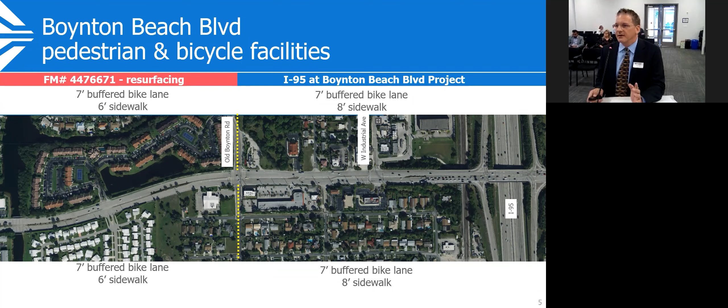I have a few slides here to show you exactly how the project lays out with the other two projects and to show the continuity. From the west, you see there's our project, a resurfacing project to the west. And then the project in the middle, the I-95 Boynton Beach Boulevard project, is the one being discussed today. And you see some of the elements for the buffered bike lane and the sidewalk, trying to maintain continuity with the project to the west.

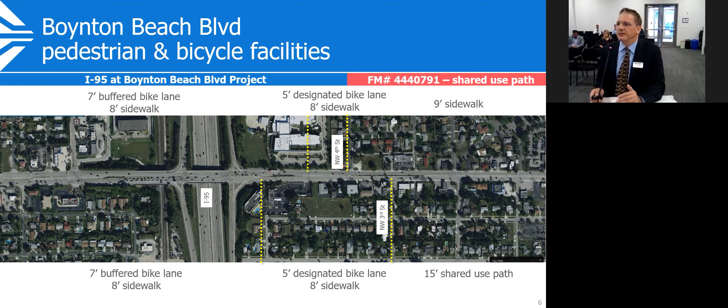And then going further east, there's another project, a shared use path project to the east. And so this project is in between, and they found a way to harmonize it and establish continuous facilities through Boynton Beach Boulevard. And so with that, those are the two projects. If there's any questions, I can answer them at this time.

Staff, are there any public comments on this item? No, Madam Chair. Okay, I need a motion to recommend adoption of amendment number 2 to the TPA's fiscal year 2022-2026 TIP, and then I will open the floor to discussion. Motion to adopt. Second. Sorry, who is the second? Thank you. Okay, now I'll open the floor to discussion. I do have 2 tent cards raised, and I don't have virtual hands raised at this time. Okay, Alex, let's start with you.

Yeah, I just had a question. If you had a little bit more detail on the PGA at I-95 project, because I see the description just mentions that this is to add a special use lane, auxiliary lane. I was just curious as to what that exactly meant. I actually moved to that area a few months ago, so I have special interest in this project. Yes. I'm going to reach out to FDOT to find out exactly the nature of that. Do you have any additional details? I don't, but maybe during the course of the meeting I'll reach out via email. I was just curious whether this was adding capacity. What is the nature of that auxiliary lane?

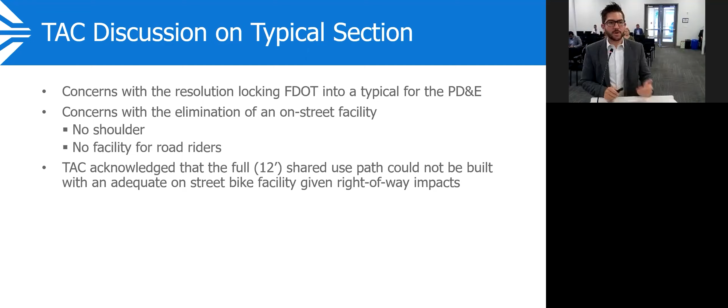There were also some concerns with the elimination of the on-street bike facility, mainly because that on-street bike facility also creates a shoulder, and removing it doesn't provide a facility for riders that prefer to ride on the roadway. The TAC did acknowledge during the meeting that it's unlikely to fit the full DOT FDM spec shared use pathway along with an on-street bike facility, given the right-of-way impacts. In addition to the typical section, there were 2 other comments. One was regarding the displaced left turns. There was some support for that during the TAC discussion.

And another item that was pretty heavily discussed was the inclusion of shade trees in the swale if possible. We did speak with FDOT regarding this. The landscaping can be part of a future project, but TPA staff is going to have to work with DOT a little bit more regarding funding options for that future project, and it will have to be a separate project in the future. But again, it's still an option, so we're going to be exploring that.

So finally, that leaves us with the resolution language, which I have on the screen for you here. We worked with DOT quite a bit on this resolution language, and we think it provides the flexibility that everybody was looking for, especially regarding the typical section itself, as well as not locking DOT into an intersection typical for the Jog Road intersection. So with that, I would like to move to recommend the new updated resolution language. Thank you.

Okay, staff, are there any public comments on this item? No, Madam Chair. Okay, I do have a comment on that. Well, I was going to say, I do have quite a few tent cards and I have virtual hands raised as well. I don't know if you want to do virtual or the in-person first. Let's do the in-person first and then we'll pull the virtual. Okay. So we'll do this before we have a motion? Or should I get a motion? It's your preference, Madam Chair. Yeah, I think we'll start. CJ? Yes.

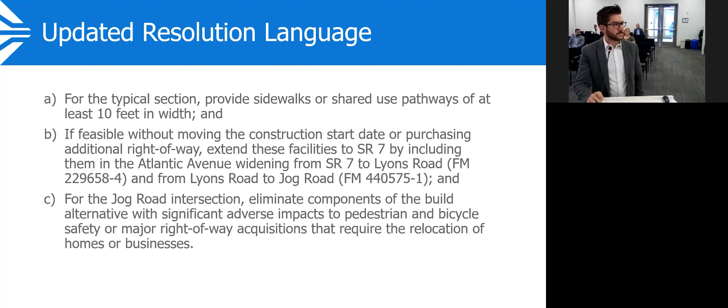Connor, as you know, the town of Jupiter has proposed the alternative design for the intersections. And after you updated the information, right now FDOT is evaluating if that is feasible. Yes, that's correct. So we did have staff internally review it as well. They did express some concerns, particularly with the pedestrian crossings and the pedestrian islands and the number of those. But as far as the feasibility of it, I'd have to leave that to DOT. I don't know if DOT wants to speak on that.

The geometry that we had concerns with. One was the concept that we saw was drawn with 4 lanes on Jog Road as well as Atlantic Avenue at the intersection. So it doesn't provide for the 6 lanes for the future condition. Another thing that we were looking at was regarding the shared use paths. There were no on-street bicycle lanes, so the shared use path with the 10 feet would still require 4-foot clear on both sides. So we would be expanding that by 8 feet on each side, the right-of-way widths.

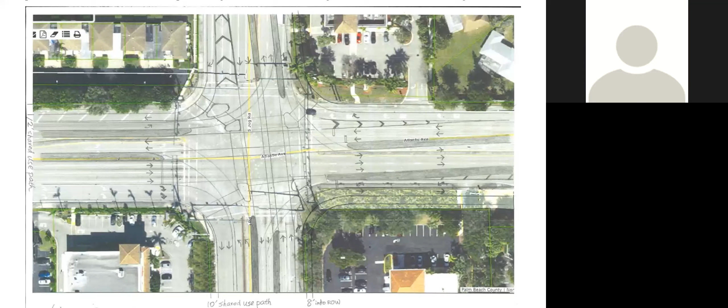Yeah, we can have a separate meeting, but as Connor said, there's still the safety concern and access concern and driver expectation that is going to remain in addition to the right of way, if we assume that the level of service or delay is going to be resolved.

And let me just briefly address that in terms of the pedestrian crossing, as well as the cyclist, the safety compared to the traditional intersection design, which does not allow the pedestrian to get through the intersection from one corner diagonally to the other corner within a cycle. This particular design can allow the pedestrian as well as the cyclist to get through intersections, even diagonally from one corner to the other within a cycle.

And there is much less time spent crossing this intersection. So with much less time crossing the intersection, pedestrian crossing safety will be further ensured. And the concept of this design is the pedestrian and the cyclist will be moved through the shared use path, 10 feet to 12 feet wide, to get through intersections, as opposed to the current 12-foot crosswalk here.

And the refuge island within the intersection is much bigger, for staging the cyclist and pedestrian safely onto the refuge island. So yeah, compared to the existing intersections, the pedestrian crossing safety has the full benefit compared to a traditional design as well. So we can discuss this in a separate meeting.

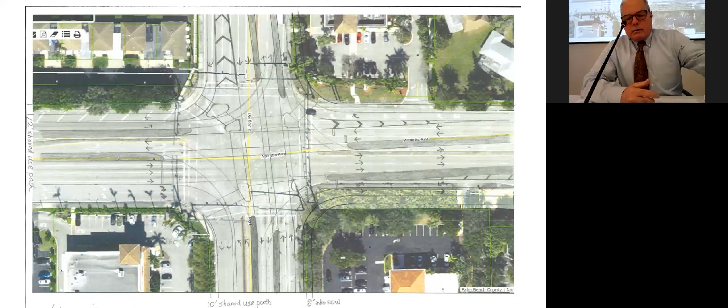Correct. So DOT is still entering the PD&E study, so they're still going to be working through some designs of the intersection as well as the typical section. So right now we're just moving forward with supporting it. We just wanted to honor the board's direction and steer away from designs that would severely impact right of way, specifically in the northwest section.

One of the concepts with the partially displaced left had a lot of impacts to both access as well as single family homes in that northwest section. So we wanted to steer away from that, but still allow DOT the flexibility to design the best typical and intersection design.

Okay, the other question I had was it talks about a typical section with sidewalks or shared use paths of at least 10 feet in width. Is that an acceptable dimension to be considered as a shared use path? So I believe the resolution says either a shared use path or a 10-foot wide sidewalk. I could be wrong, is that correct? It says provide sidewalks or shared use pathways of at least 10 feet in width.

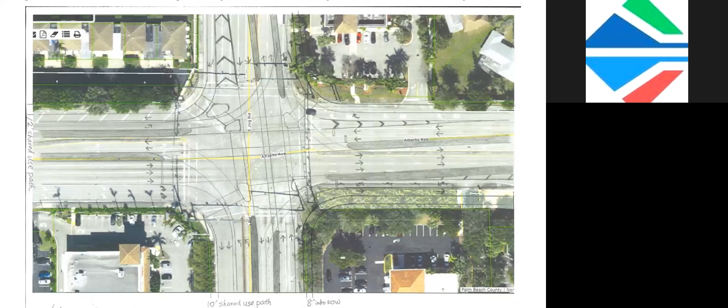Correct. So we worded it that way because the FDM has very specific guidelines for what a shared use pathway is. For the TPA, a 10-foot wide sidewalk could be considered a shared use pathway, but we did want to keep that wording in there so that if it's a 10-foot sidewalk to DOT, we can still build it, and cyclists can utilize it as an area in which they can feel safe to bike.

You also mentioned to the other gentleman in your responses that you were going to require another 8 feet of right of way to be able to use that 10-foot shared use pathway. Can you elaborate on that a bit? Yes, so the concept that was just up did not have any on-street bicycle facilities. It only had the 10-foot sidewalk.

It was labeled as a shared use path, but in order for it to meet shared use path criteria, it would need to be 12 feet wide and have a 4-foot clear in the front and the back. So leaving the resolution saying 10-foot or 12 keeps that open: if we do use a 10-foot sidewalk, you can eliminate the 4-foot clear on each side, but you will still need an on-street bike lane with that type of concept. Okay. I don't think the resolution says that though, does it?

It's open. It's open-ended. Or is it for the purpose of it provides sidewalks or shared use pathways of at least 10 feet in width. So it does not say anything about the removal of the on-street bike lane. So if you do go with the 10-foot sidewalk, you will need the on-street bike lane. If you go with a shared use path, it'll have to have the 4-foot clear and be 12 feet in width.

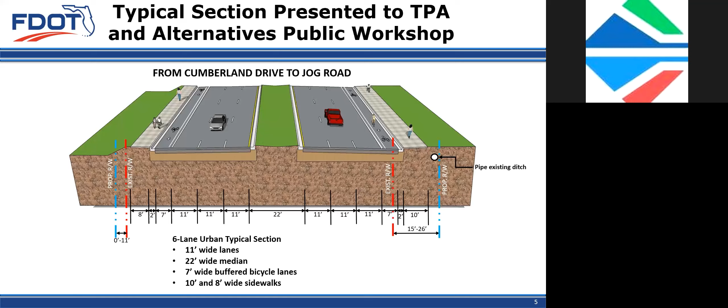Good morning. I'm Rudy Gutmurray. What I would like to add is, the presentation that we did and the typical sections that we presented do fit this resolution, right? So as a committee, you have those three typicals that fit within this resolution. And you have an option today, you can recommend one for the board's consideration. That's also a possibility. Rather than come back 3 months later, 2 months later, I would rather have you take a look at those typicals again that fit with this resolution and potentially make a recommendation that could be carried to the board. That could be one of the options.

Because there are some significant differences between some of them and options 2 and some of the others. So if we want, we can go over those three typicals that meet this language that you just saw and describe those. And maybe we can take a look at those if you want to make a recommendation today. I just want to make sure that that would be okay. I mean, I'm okay with that. That's not what is in the agenda.

So as an advisory board to the board, right, we're making a recommendation from the technical side of the business. So we've conducted an alternatives analysis and we've developed these three typical sections. And so that's what we're going forward to. Essentially, we will finish the analysis on those three typical sections. We're still working with the Water Management District to try and minimize right of way along the canal side of this typical section that would allow us maybe some flexibility there in what would ultimately be recommended.

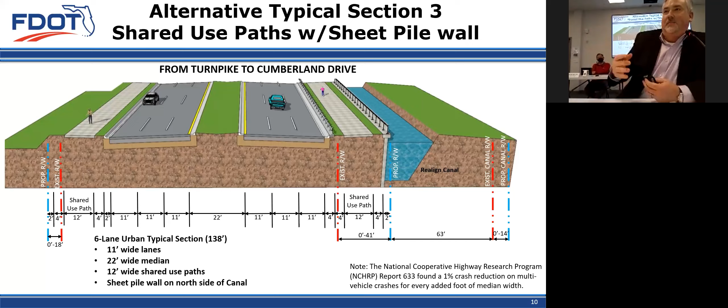Thank you. Just in looking at the typicals, you're proposing something in excess of 130-foot typical section. Is that still roughly the numbers we're talking about for a right of way? Because I'm interested in the larger picture or the implications of what this could mean. Correct. It's going to be up to an additional 8 feet of right of way from the original concept that we proposed, from 4 to 8 additional feet. And so the current ultimate right of way is 130. 130, okay. Yeah. It's not what we have on our typical or our thoroughfare map at the county.

This is a suburban C3 context under your context manual. You all are undoubtedly doing other PD&E projects and you're running into this throughout District 4, I'm assuming. Is this a typical example of what you're seeing in that context, that you need right of way beyond the ultimate right of way that you'd previously identified?

And I may be asking the design people, and this is more of a planning concept, but I'm trying to understand, do we have a situation where a lot of the thoroughfare maps and so forth, ultimate right-of-way maps that have been identified, are based on an older, non-Vision Zero, not a complete street concept? And so we're going to need to go back and modify a lot of thoroughfare maps to ultimately express larger rights of way because of these concepts of Vision Zero shared use going forward.

Because my concern is the context may be that, and to do all these other things, but we've not done the nuts and bolts, even at the county and municipal level, of what does that mean ultimately for the DOT roads? And that's what I'm trying to get at: is this indicative of a larger problem we're looking at, that the context is going to demand further changes that are going to be knock-on changes?

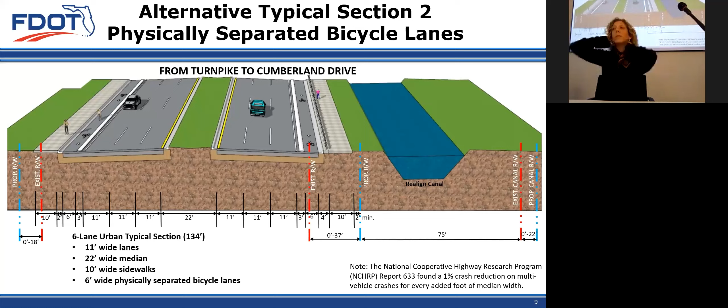Thank you. I just have a couple questions because I'm trying to understand where we are in the process related to Alex's comments on whether this committee should evaluate at this current moment the alternatives that are suggested. So from what I understand, DOT has presented a previous project as part of the TIP, and it was not supported by the TPA governing board. And since that time, TPA staff has been working with DOT to refine alternatives to accommodate the needs of all users. And so these suggested alternatives are being conceptually approved, and you've crafted a resolution which captures these concepts, but DOT still has to go through the entire PD&E process, right?

So the presentation that the board received was somewhat similar to this. It had different typical sections. It had different alignments for the Jog Road intersection. The board just expressed concerns about certain aspects of some of the concepts. And that's where we started working with DOT directly to figure out which typicals we could move forward with, which typicals we didn't want to move forward with based off those discussions that the board had.

And that's where this resolution comes in, where it phrases it so that it gets rid of those concepts like that displaced left that was eliminating, I think it was 8 homes or something like that. It gets rid of those, but still maintains certain typicals and intersection alignments. But again, it still allows DOT to have that flexibility to continue with their PD&E process, have their public meetings, show the public different options and see what they think of those different typical sections.

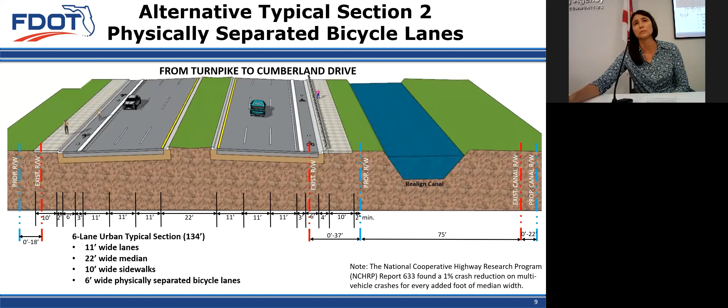Just to give a little bit of a time frame, we did have a public workshop 4 months ago. That public workshop was based on a typical section that was used for alternatives analysis that was concurred by TPA at that time. And we went for the public meeting, but from that public workshop, and since the typical section was approved by TPA, approved may not be the correct word, concurred by TPA, the board decided to change the philosophy about how the pedestrians and bicycle movement should be handled.

So after our public workshop, during the public meeting, there were some comments made about potentially separating the bicycle lane from adjacent to the travel lane. So we went back to the board after our public workshop to present the summary of the public workshop and what alternatives were presented. And during that board meeting, we were requested by the board to look at potentially separating the bicycle lane from the travel lane and maybe using a shared use pathway that meets the FDM guidelines.

So since then, we went back to the drawing board. We worked with the TPA hand in hand. We developed 4 or 5 other typical sections that meet the FDM, Florida Design Manual, for the design. And we presented that to TPA. And in that meeting, TPA staff looked at those typicals, and based on that, there were 3 typical sections that kind of met the board's guidelines to separate bicyclists from the travel lane, the typical sections that you see here that were presented during the previous presentation. There were 3 or 4 typicals that kind of met the direction the board provided to us. And we presented those typical sections during our last meeting.

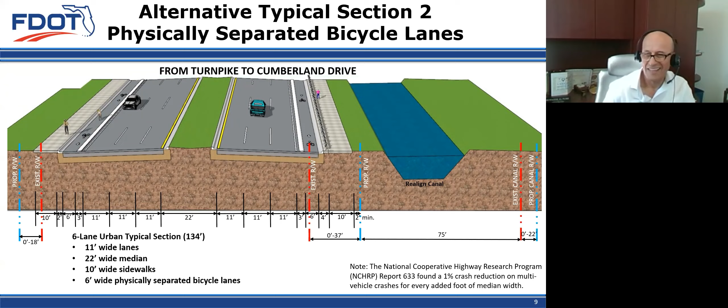So Mo, from an operational standpoint, nothing has changed with these typical sections. This board has looked at the operations and essentially we're providing a 6-lane roadway. The big alternatives came into play at Jog Road. And then the revised typical sections specifically relate to how much right of way is going to be acquired and how we're going to take this piece of Atlantic Avenue, from Turnpike to Jog, and retrofit it or transition it from the piece to the east. And we've got a project already under design to the west.

So it is a balancing act. More right of way we need, more money we need. It'll take longer to then acquire the monies in the work program and fully fund the right of way. So whatever the effect of the decision of this TPA will have on the project, we will listen to the direction given by the board in terms of their desires. And if we can make it fit within our FDM guidelines, we will go forward with that as our recommended alternative, secure our environmental approval, and then start amassing the monies necessary to do this.

So one of the things that we've been told is this is a very high priority for the TPA. By the public, it can't happen fast enough. So we've got design already underway for this, I think this consultant's been selected for this. So we're ready to go to the next phase, but we do need direction on what the typical section needs to be. And I know we're wrestling with much bigger programmatic issues.

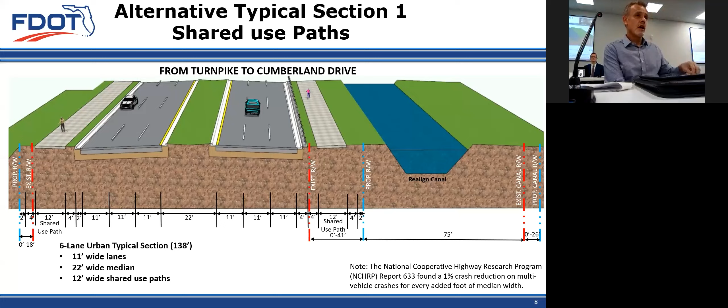Correct. So you have done some type of analysis comparing those 3 alternatives. You indicated that you needed to evaluate and compare them, and that has happened to a great extent. May I? Sure. So that evaluation that you see is conceptual, right?

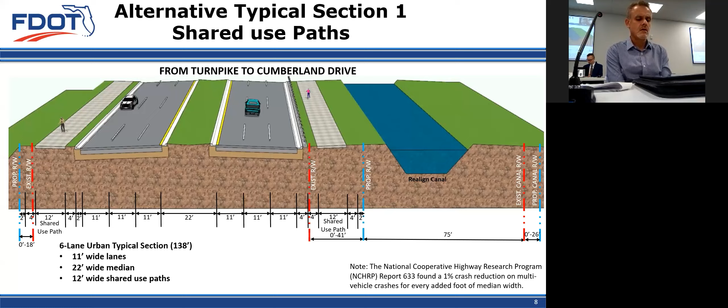We took the typical section 1, with the 2 shared use pathways on both sides and no bike lanes adjacent to the travel lane. Typical number 2, we have physically separated bike lanes and 10-foot sidewalks on both sides of the roadway. And the third typical is, again, no bike lanes, with guardrail and multi-use pathway on both sides.

So what we did, we took these widths, 138 feet, 134 feet, or 132 feet, and then conceptually looked at a higher level at what would be the right-of-way impacts.

How much extra right-of-way are we going to need? What impact is it going to have on pedestrians and bicyclists? Now, that's at a conceptual level. Once we select whichever typical section gets recommended, then we will actually have to do alignment, like engineering drawings, to be more

concise with the impacts. In some locations, it could be modifying the intersections, modifying the intersection geometry and all that. So that's why I said we did a conceptual level analysis. And once the typical is selected, we'll do a detailed analysis like we did before our alternatives workshop to present it to everyone.

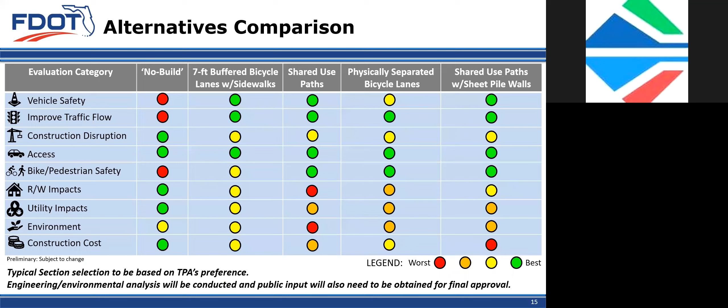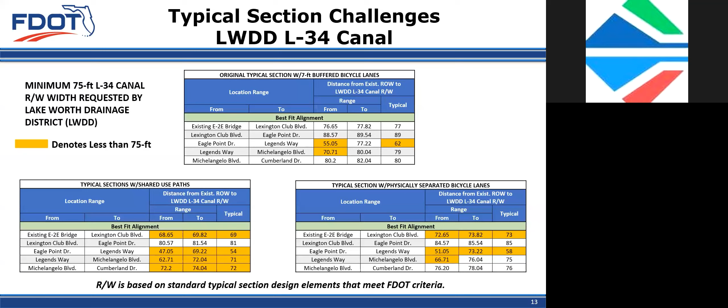And that's fine. My other bigger question, and again, the big issue that I have with the alternatives being proposed: from a bicycle pedestrian safety standpoint, we're saying all three alternatives are the same or similar, all have a green dot according to this alternatives comparison. As I indicated in the meeting we had 2 months ago, I had a significant concern with any option that removes on-street bicycle lanes.

There is a safety concern because you're still going to have cyclists using the road, but now there's absolutely no place for them to go. So to indicate that an option like that would have the same level of bicycle pedestrian safety as an option that actually provides on-street bicycle lanes, I have a disagreement there.

The second one is, if we're now saying all of those cyclists are going to be using this shared use path, several studies have shown that shared use paths in areas with a number of conflict points between cyclists and vehicles can actually result in an increase in accidents.

A few weeks ago, I was in this general area and decided to drive the corridor because I hadn't been there in a while, to familiarize myself with it. There's some diversity in the corridor, not all areas are the same, but some sections have a multitude of curb cuts, driveways, commercial plazas with supermarkets, cinemas, and things like that.

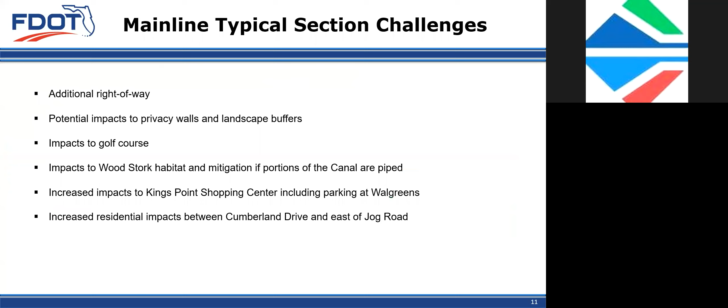Mhm. And we can certainly respect everything that you mentioned. It is valid, right? You're a professional in the business. And I think in terms of the body of knowledge that's accepted by Florida DOT and the Florida Design Manual, we don't have a design in there that we believe is unsafe or one is less safe than the other. So we are accommodating the pedestrians and bicyclists in a safe fashion.

Now, degrees of safety, there's a couple studies that are suggesting. I thought that the colors indicated degrees of safety, but well, and so this was our assessment. And if you have a contrary point of view, this is a great forum to bring it up. And if you think we should change those, that should be a recommendation to the board.

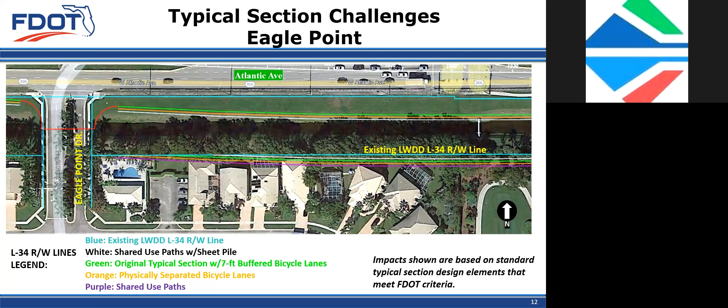One thing that you did point out is you said you do not support... Sorry, can you talk into the microphone? Thank you. One thing you pointed out was that you do not support an alternative that does not provide the on-street bike lane. And I do not, again, because of the concerns that I just indicated. I think it increases risk for cyclists.

There's going to be cyclists riding on this road, and now they absolutely won't have a facility. And second, if we're now saying all of them should be riding on this other facility, that would be okay if we had an area in which there's no conflicts with vehicles. There's multiple conflict points, and that's why I wanted to drive the area. I'm familiar. There's quite a few. So that would create a less than safe situation for cyclists.

I respect your comments, and those are very valid comments. But still, we have to go forward with one alternative that you all recommend. So that's the guidance we are looking for to move this project forward. We are already 6-7 months delayed. So help us to move forward and take this project, which is a priority for the county and the TPA, to the PD&E and final design and ultimately construction. So that's what we are looking for.

I have another comment. Levi? Yes, thank you. How do you envision Palm Tran boarding and alighting passengers with the guardrail? We don't currently have service on Atlantic Avenue, but it is part of the 561 corridors, and we envision that in the future. So I'm curious how the mechanics of that would work.

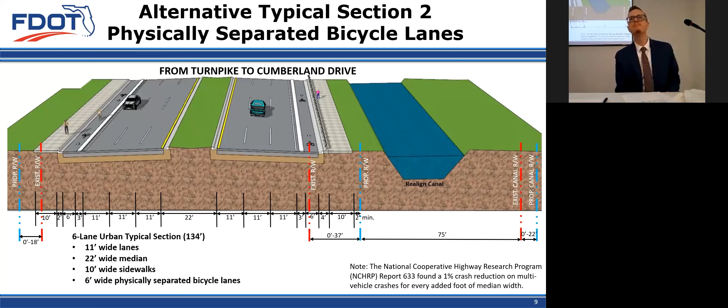Let me go back to the issue raised by Alex. I do share your concern, because the speed differential allowing both modes of users, riding and walking, on the shared use path does create a safety concern, especially when the level of service is degraded or the volume of pedestrian flow increases. In some of the jurisdictions I have visited, like Cambridge and the city of Boston, they actually do not allow bikers to ride on the sidewalk. So what would be the compromise then?

Can DOT consider the option of dividing the 12-foot shared use path by striping, so the left side is a bike lane and the right side is only for pedestrian flow? I mean, it's not the panacea, but at least this is an option for running both of these in their own separate right of way.

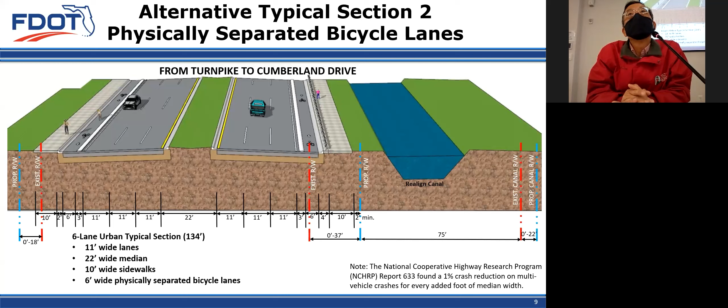That may take care of any issues of speed differentials between pedestrians and cyclists, but I don't think that would address the issue of the conflict points between cyclists and cars at driveways and other areas, because you're still going to have the cyclists using the same facility. The problem is drivers are not expecting cyclists, which are going much faster than pedestrians, to be coming back and forth in both directions in this type of facility. That is why, in a context with a lot of conflicts, this can be quite dangerous.

You mean right there on the sidewalk or shared use path, which in this case is pretty much the same? You mean on driveways? As the drivers are making turning movements in and out of those driveways, intersections, and access points, they are not thinking there may be cyclists coming in both directions very quickly. They may think there may be pedestrians, but pedestrians move significantly slower. So the chance of a driver pulling out and hitting a pedestrian at those points is less than having that conflict with a cyclist.

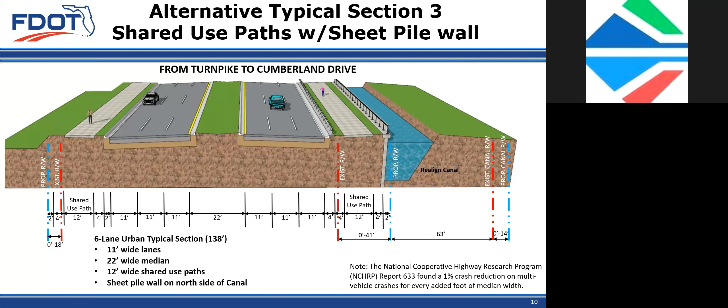Again, this works if you have minimal conflicts. If you have significant conflicts, which there are in quite a few portions of this corridor, that is what I see as the main concern with forcing all cyclists into this type of facility. Yeah, I can see having the on-street biking facility in conjunction with the 10-foot sidewalk has the least amount of right-of-way requirement. It is my preferred one.

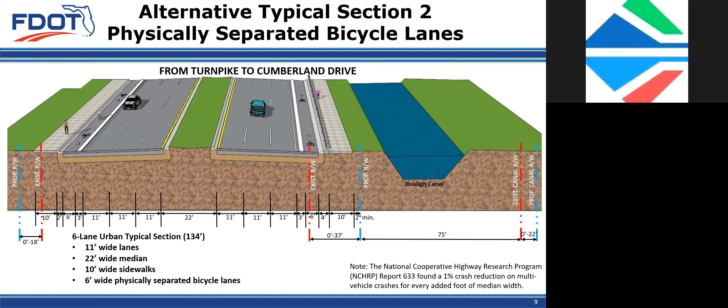And again, I'm not sure we're in a motion, but that would be the one I would support: Section 2, which provides those two types of facilities. There's still a 10-foot shared facility for pedestrians or cyclists who may not want to ride on the road, as well as an on-road facility, and it also has less right-of-way required, 134 feet as opposed to 138. I think that would be the best option in this case, and the one I would suggest we recommend if we are going that route. Okay, thank you. Maria.

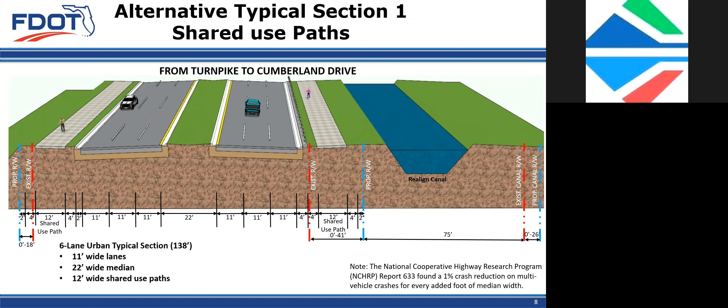Yes, I would like to go back to the item that we have in front of us, the resolution that we are evaluating. It has three conditions. The first one is provide sidewalks or shared use paths of at least 10 feet in width. Is this supposed to be on both sides of the road? Yes, that's correct. Okay, should we then spell it out? I just feel more comfortable if it is spelled out.

That's up to the TAC. I have no reservations about that. I would amend my motion to include that, because that's been a point of conflict in other projects. Okay. I will second that motion. Natalie is the second. That's fine. Okay.

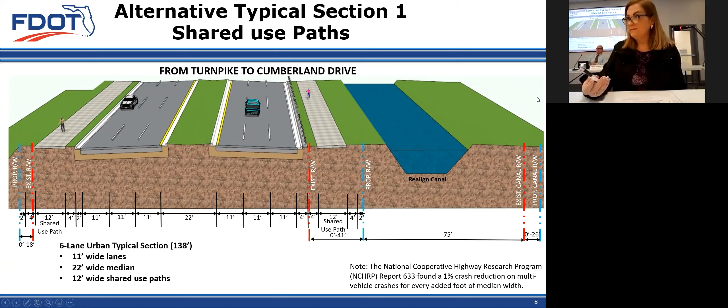The next one is, if feasible without moving the construction start date or purchasing additional right of way, extend these facilities. I'm assuming these facilities pertain to the sidewalks or shared use pathways. Yes. We may want to spell it out. I'm not sure. Doesn't really matter. We didn't spell it out, I mean, we could probably clarify it a little bit more, but we didn't spell it out in there just because the first clause is a little bit open, again, to allow DOT that flexibility. But if you have a recommendation to help clarify that sentence.

You're clarifying it for the record. Okay. Just for further clarification, just a question. So by these facilities, if the option is to go with on-street bike lanes and off-road facilities, then these facilities would include both things, correct? Correct. Again, if feasible and if it fits in with those parameters, then yes, correct. Maria? Okay, if that is the case, maybe we want to add in here that instead of extend these facilities, maybe extend pedestrian and bicycle facilities. That way it's 100% clear.

So the other projects, and I guess, John, correct me if I'm wrong, they do include bike ped facilities on those projects. The idea here is to make them consistent, if again feasible. So it would be to extend whatever concept is decided here to those other projects that are already going on. Again, one's already in design and the other one is, I guess, going through feasibility? I'm not sure. But they're already in the process. So again, I do want to highlight that if feasible, we'd be extending those, but making it consistent if possible.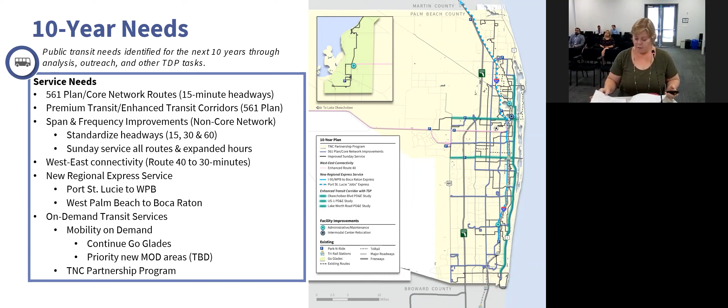And then I also wanted to point out the Wi-Fi enabled fleet. All of Palm Tran's fixed route buses currently have Wi-Fi. So this is looking at Wi-Fi on the connection buses as well as the Go Glades service.

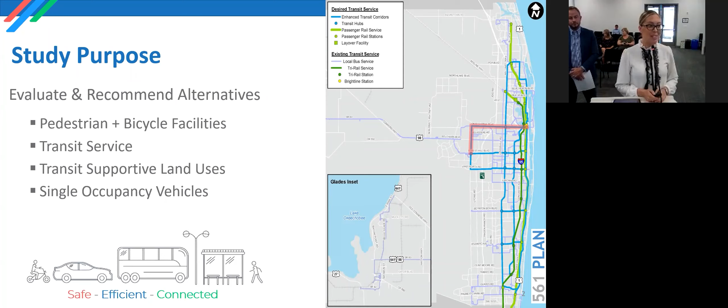This very much is in alignment with your 561 plan on creating a safe, efficient, and connected system throughout the county. Why Okeechobee and State Road 7? It's probably obvious to many of you in the room, but this corridor has very many residents across it, about 42,000 that could use a different type of system than what we have today. Also, there are a lot of jobs, 46,000 jobs in this area highlighted on the map. The limits are on State Road 7, starting at the Wellington Mall and heading north to Okeechobee and going all the way east into downtown West Palm.

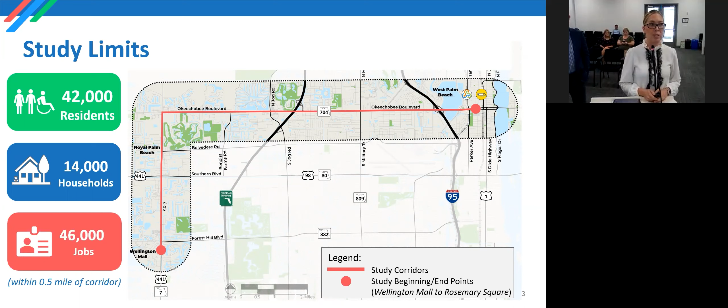So with that, I'm going to pass it to Stuart, who's going to, with me, walk through some of the existing conditions that we found in the corridor. And Jess and I are really going to tag team this presentation. So we're just going to go back and forth here because we are working very closely and integrating our teams together on the project. So crash data along the project corridor show that multimodal safety is an issue worthy of being addressed immediately.

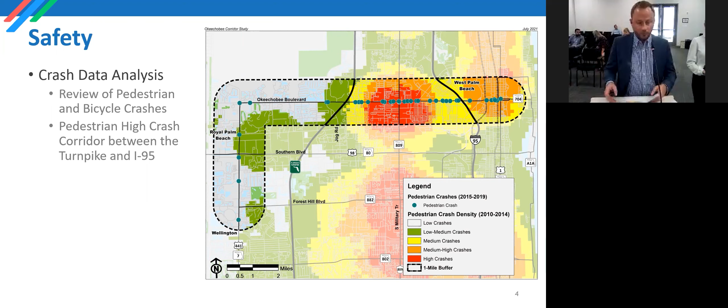The heat map that is shown on this slide is from the TPA's pedestrian and bicycle safety study. It shows that the portion of the study corridor between the Turnpike and roughly Congress is one of the worst areas within the county for pedestrian crashes. The TPA's Vision Zero plan found a very similar outcome, and a review of crash data that we are conducting as part of the current Okeechobee Boulevard and State Road 7 study, data from Signal 4 Analytics, show that this corridor is one of the few corridors that has actually more bicyclist crashes than it does pedestrian crashes, although the bicyclist crashes are more spread out, pedestrian crashes being more focused in that area between the Turnpike and Congress.

Obviously, the existing transit conditions are a big part of our analysis, and we've been able to build from the work that Palm Tran conducted as part of an Okeechobee Boulevard existing conditions assessment from January of 2021. This corridor, as it's drawn, is very important as it links two transit hubs from the mall at Wellington Green to the West Palm Beach Intermodal Center. Route 43 is the West Palm Beach crosstown route. It's a big part of our existing conditions assessment. It is not exactly analogous to the study corridor. There are portions of Okeechobee Boulevard that Route 43 does not serve.

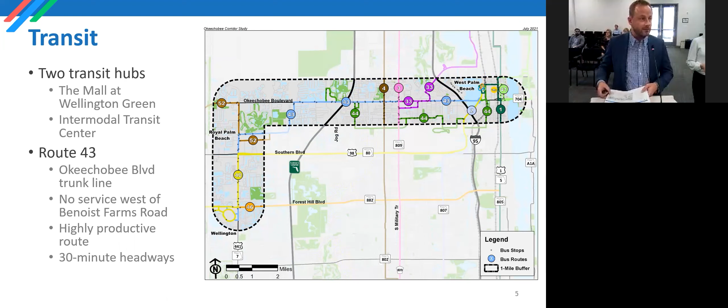However, it is known to be one of Palm Tran's most highly productive routes in most of the monthly ridership assessments. So productive that during the course of this study, Palm Tran has actually upgraded the service on Route 43 to now 20-minute headways instead of the 30 that it used to be.

And another important piece that we were able to, working with the TPA, incorporate into this corridor study that you don't often see in transportation studies is the impact on health. So how the decisions we make in infrastructure impact the health of the community. So we wanted to make sure we showed under this existing conditions analysis our assessment looking at data in terms of health disparities, so the health conditions of the population and communities within the corridor. And then also looking at an overall social vulnerability index, which takes into account communities' makeup in terms of housing and transportation costs, race, ethnicity, and language, socioeconomic status, and also household composition.

So what we intend to do with this existing data, and you can see where the vulnerability lies within this corridor, is, working with Stuart and his team and the TPA, we're going to assess how the decisions we make looking at the different transportation alternatives impact the most vulnerable in the communities. And we'd like to try to eliminate or alleviate as much as possible any additional suffering for communities that already are at a potential disadvantage through the corridor.

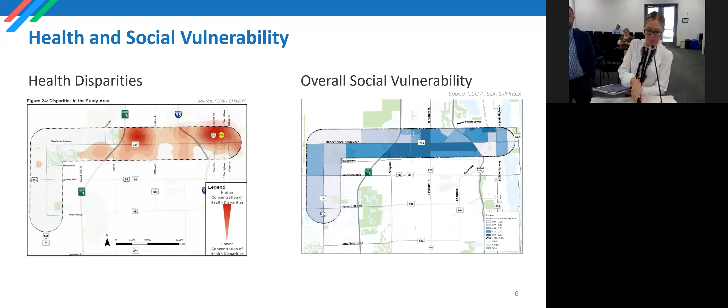Before we get into the alternatives, we walked through the existing conditions analysis, but for those that maybe don't do corridor studies often, I wanted to walk through the different components. We've already alluded to some of this. A major component of this study is the land use and economic development analysis. Later on in the presentation I'm going to give an example of what we mean by that and how it plays into our decision-making in this study.

Stuart, as you heard, walked through the transit analysis under existing conditions, but he will also be walking you through future conditions and evaluation of alternatives. Roadway analysis was an equally important component of this study, knowing that the roadway makes up all the different modes, so we want to make sure we capture that in our analysis. As I just mentioned, the health impact assessment is an important study component in how we're impacting health in our decisions. And very big throughout the whole project is public and stakeholder engagement.

I want to thank many of you on this committee who have been involved in this process. We've had stakeholder interviews, we have a technical committee, and we have workshops. We've already held one that I'm going to walk through, and we have one coming up as well. The public workshop we held was August 19th through November 12th, in person on the 19th and then virtual through November 12th. This first workshop focused on engaging with the community on what they observe as the issues and opportunities from the Wellington Mall all the way to downtown West Palm.

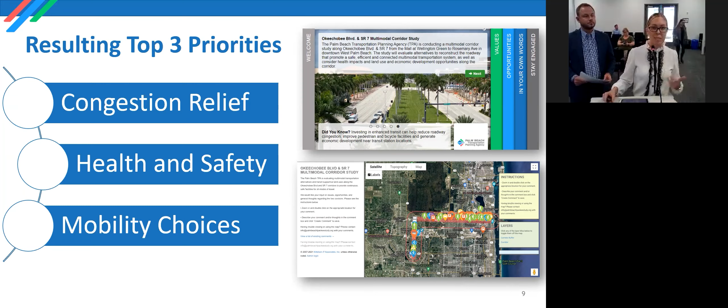As a result of all of that interaction, these were the top 3 priorities we heard from the community: congestion relief, health and safety, and mobility choices. So it was really great to see that synergy and alignment with what the TPA is already trying to achieve and what we anticipated going into this study as being the needs moving forward.

It's not surprising from the results of the public survey that congestion relief would rank so highly, given the baseline traffic inventory we are conducting as part of this study, which is typical with the level of detail found in an alternatives analysis phase for a transit study. The baseline traffic inventory shows that the corridor handles a high volume of people traveling in cars. Base traffic volumes range from 42,000 AADT on State Road 7 between Belvedere and Okeechobee, which incidentally is the only 6-lane segment of the corridor. The entire rest, other than that 1 mile, is 8 lanes in typical section. Volumes range from 42,000 up to 77,000 that Okeechobee carries between I-95 and Tamarind.

With that level of traffic volume, there is a lot of traffic capacity. I mentioned most of the corridor is 8 lanes. So in the base, as well as several segments in the LRTP horizon year, it's currently projected to operate at level of service C or D. In the peak hour segment analysis, there are a few additional segments in 2045 that are projected to operate at LOS F. In fact, the whole segment from State Road 7 to Military Trail falls in that because volumes are projected to increase into the high 70,000s if we do nothing other than build what's currently in the cost feasible plan.

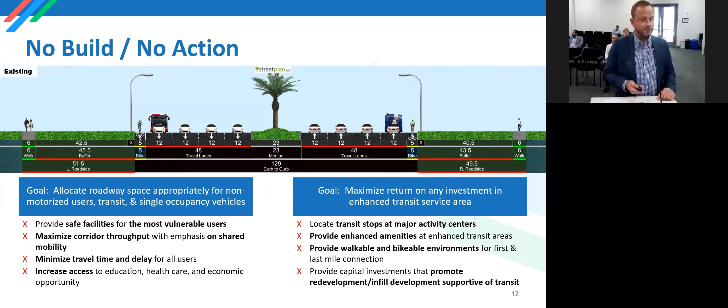So when we compare to our goals, we see that really none of the metrics are met by the no build, no action condition. So each one of the alternatives will sort of progress in terms of its level of investment. Starting with alternative 2, this is a mixed traffic bus with limited stop service. So this alternative includes having a transit bus operating in mixed traffic in the outside lane. Limited stop service just means maybe we would go to 1 stop every mile or 2 or something like that.

It would be an overlay on top of the current Route 43 service, because limited stop service by itself is not adequate to entirely serve the needs of people riding in transit because of the frequency of stops. So while this does address providing safe facilities for vulnerable users and having the ability to provide amenities and transit stops and major activity centers, it doesn't address some of the other evaluation criteria that we have.

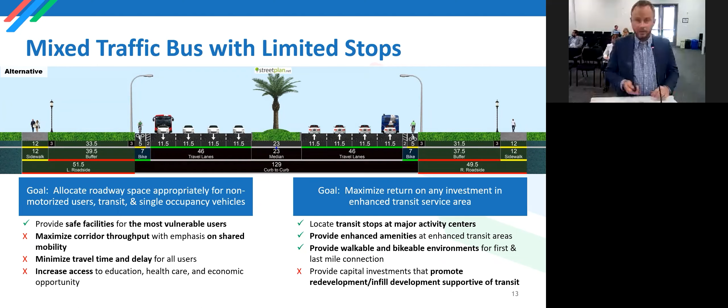One thing you will notice, though, is we've provided a little bit of a tweak in the travel lane widths here in order to accomplish a buffered bicycle lane along the corridor, and also provided a 12-foot multimodal path on both sides of the roadway. That's going to be common in each one of the build alternatives that I'm walking through, which will be to reconstruct the existing 6-foot sidewalk into a 12-foot multimodal path in order to try to meet that goal of providing safe and separated facilities for our multimodal travelers on the corridor.

Alternative 3 is our business access and transit, or BAT lanes alternative. This is a roadway configuration where the transit vehicles would have preferential use to the outside lane. The use of the outside lane could also include people making turns from the corridor, or hence accessing businesses. That's where the BA in the BAT lane acronym does come from. A lot of the corridor has dedicated right turn lanes. And so in that type of a configuration, the use of the right lane would be for merging across the BAT lane into the right lane.

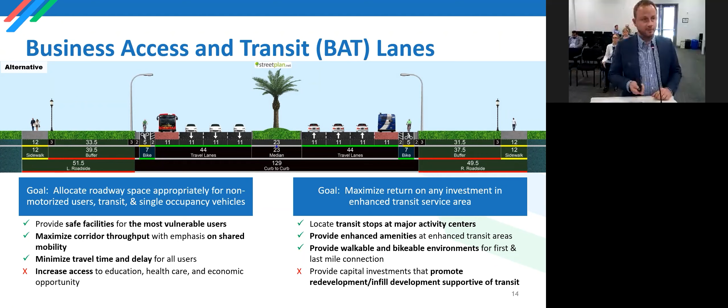But in more constrained areas of the corridor, in particular east of the turnpike, that BAT lane would be crucial for allowing motorists to be able to turn right onto side streets or into businesses. Also buffered bike lane, as well as the 12-foot multimodal paths on both sides of the roadway as part of this alternative. The next 3 alternatives are going to be dedicated lane alternatives.

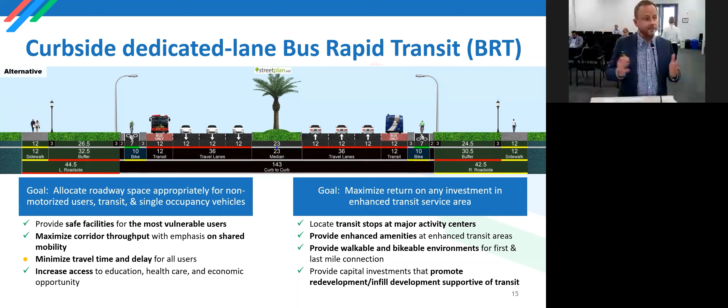The first of which is a curbside dedicated bus rapid transit lane. In this alternative, the transit has exclusive access rather than just preferential, but exclusive access to the right lane. So this would be a lane repurposing alternative. It meets most of the criteria that we're evaluating as part of our evaluation, with the exception of minimizing travel time and delay for all users. So although it's faster for transit users, it does come with what we think would be about a 15 to 20% additional travel time for motorists, because the lanes would be going from 8 lanes to 6 lanes from the perspective of the single occupant vehicles.

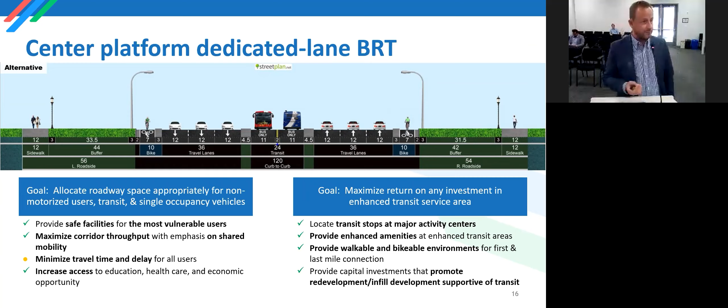The next alternative is similar, but it's a center platform dedicated bus rapid transit. So this would be an exclusive 2-lane road in the median of Okeechobee Boulevard where the transit routes would operate. So the access to the transit service would be through center platform stations in the median of the roadway. And we also expand the road in this case to include protected bike lanes as well as the multimodal pathway. This level of investment would likely incur more of a reconstruction scope of the roadway rather than just the resurfacing scope that we saw in some of the previous alternatives.

Then alternative 6 is similar, except we're looking at light rail transit instead of bus rapid transit. So this is one of 2 rail options that we are looking at. The geometry is similar, except the transit technology is different. One thing to note about these 2 center platform alternatives, in addition to a reduction in through lanes from 8 to 6, there would be impacts to the signal operations as well.

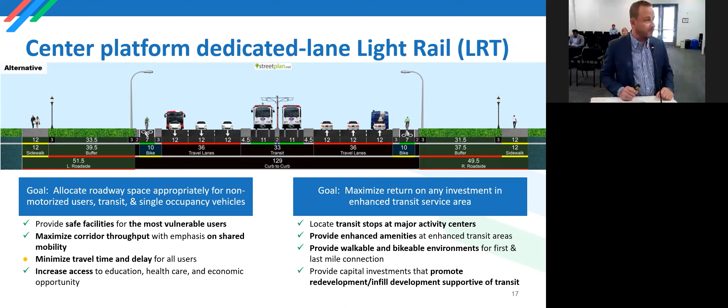Likely some of the intersections that currently have dual left turn lanes would be redesigned as single, unless the right of way were to allow them to still have 2 left turn lanes. That's probably true more in the western part of the corridor, but in the eastern part of the corridor we would likely be looking at single left turn lanes. This is similar to some of the peer facilities that we're reviewing from around the country that have implemented center platform transit, either bus rapid or light rail.

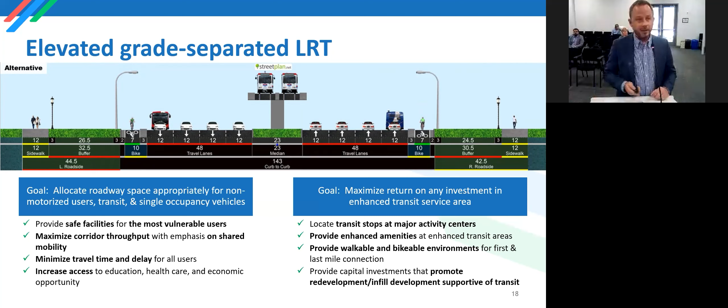Then the final alternative is elevated grade separated LRT. So this is the only one that meets all of the evaluation criteria, although it does come with lots of additional construction costs and some additional time for implementation that would be required. It's by far the highest level of investment. And you can see that on the next slide of the presentation, which looks at our initial conceptual alternatives evaluation.

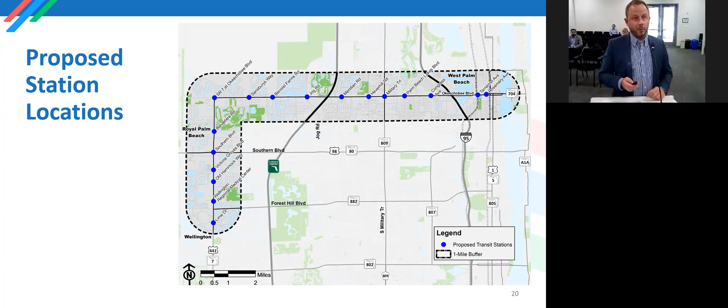The proposed station locations, we have kept them constant for evaluation purposes and ridership to kind of provide an equal analysis. There are 17 proposed station locations along the 13.5 mile journey of the corridor from Wellington to downtown West Palm. Now I'll hand it back to Jess.

So that's a great segue into the land use discussion. So how does infrastructure and land use work together? I know I'm preaching to the choir a bit here, and many of you probably know this, but we just wanted to make sure we didn't skip over this and assume everyone knows. But it's a very important piece of this corridor study, especially given the transit element.

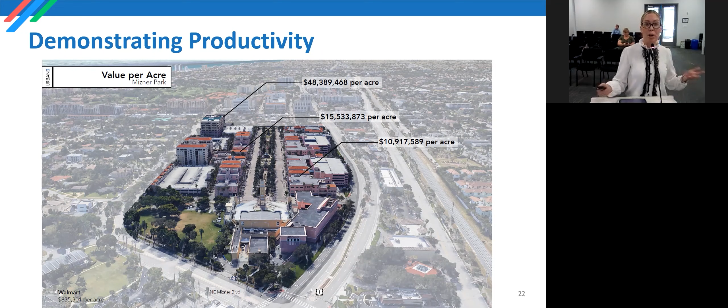So here we look at it in a bit of a different way and look at value per acre of Mizner. So we have a couple call outs here of the value per acre in Mizner ranging from 48 million to almost 11 million. And in the bottom left, it's very hard to see, but in comparison, Walmart is under $1 million per acre. So as you can see, your value per acre really changes in how you develop, and that can really make more opportunities for a city or county how you develop your land.

So we took that example for Mizner and kind of dropped it in, and this is just for theory. We're not actually proposing Mizner Park be directly built in this area, but this is the intersection of State Road 7 and Okeechobee. So north, to orient you, is to the right of the screen. So this is an undeveloped piece of land right now. So the taxable value of this property in the southeast quadrant of Okeechobee and State Road 7 is getting $0 in taxable value with it not being developed.

Now in the future, there's an overlay for this area to be mixed use. So by taking this Mizner example and putting it here, you can have a value of about 11 million per acre. So that's a great incentive as we change our transportation and this redevelopment comes, as you all know, it really can provide opportunities for the jurisdiction in the area.

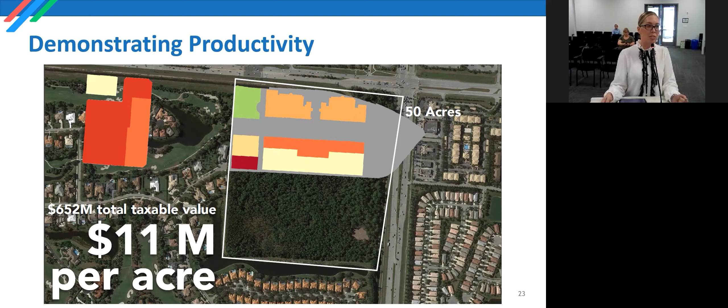So now that that land use piece is completed, I did, before going to next steps, want to share that we do have a land use and economic development group that we're working with. So if you want to have more detail on that, we're happy to share those meeting notes with you and findings.

In terms of next steps and closing of our presentation today, we are going to continue moving forward with the technical analysis on the transit and roadway pieces that Stuart walked through. We're moving forward on the health impact assessment as well and figuring out how to best incorporate that into the decision-making process, and continuing to move forward with that land use assessment as we get closer to a preferred alternative, looking specifically at opportunities for low, medium, and high potential redevelopment along the stations.

We have more meetings occurring in January and February with the steering committee and the land use and health groups. But most importantly to this group, other than the workshop coming, is that we will be coming in March with final recommendations. So Stuart walked through a lot of alternatives. So how we narrow down to a preferred alternative and what that looks like will be coming to you and your board in March. So we'll be looking for an action at that time.

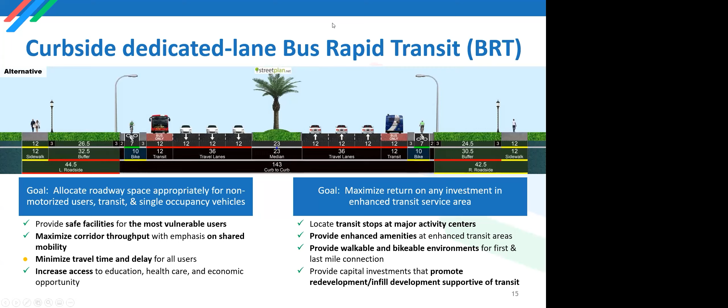Okay. Yeah, I was just wondering if in any of the alternatives, the possibility for shade trees is going to be an option. There obviously are transit stops and shelters out there currently, but a lot of them are just mostly stops, and so there's no shade for any passengers that want to ride the transit. And I think this would also help the goal of improving the health index that was mentioned earlier, and also the heat. There's obviously heat factors now, and South Florida heat is getting worse. So I just wondered if there's any consideration for shade trees in the swales, if we can do that. Thank you.

Yes, and we have gotten that feedback through the health impact assessment phase of the project as well. It's likely that could be incorporated during the design phase of the project specific to the enhanced station areas for any of the transit options, but in particular, a BRT or an LRT option would likely have the level of investment that would provide for either artificial or natural forms of shade to be incorporated around the transit stops.

Okay, I'm sorry, who was the last? Mo? Yeah, thank you. I know it's too late, so I'm not going to be talking about all of my points. I have too many of them, but I know that the design team and the research team have heard my opinion on this before. So I'm going to be touching on just a couple or three of the items that I believe are key here.